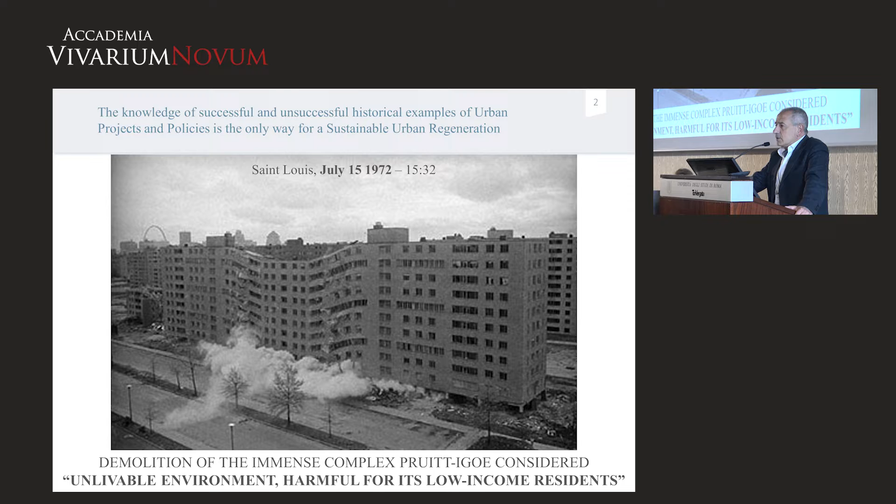Later, I decided to do like Saint Thomas and put the finger in to see if that was true or not. And I discovered that on July 15, 1972, the Pruitt-Igoe was demolished, because it was considered harmful for the working class living there, extremely dangerous socially speaking.

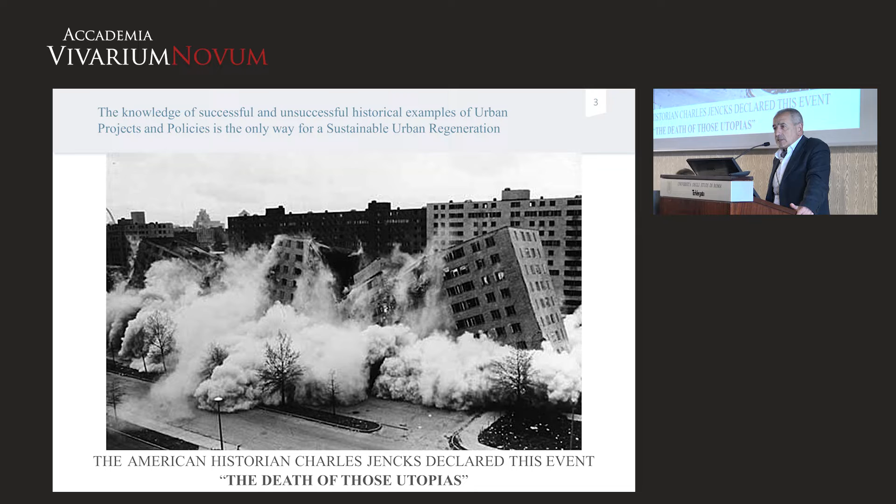Charles Jencks said that the demolition of Pruitt-Igoe was the death of those utopias. In Italy, we are so smart that just 3 years later, we decided to build the Corviale in Rome.

Come on. Today we are building a lot of shopping malls, while the United States, where shopping malls were invented, is dismantling those things. So we always arrive late and late and late. We are taking things that are abandoned abroad because probably the same investors making those things abroad know there are countries with stupid people accepting those things.

Since utilitas is important, since costs are important, I spent a lot of time in the archive of Rome. I also restudied all the laws, all the tools made in Italy, made in Rome, after the unification of Italy, because I was puzzling over the fact that the best modern buildings were those built in the worst period, when people were really pressing Rome with new inhabitants.

The city of Rome before unification had 165,000 inhabitants. In 60 years it became a city of 1,200,000 inhabitants. Nevertheless, we have quarters like San Saba, like Testaccio, like Città Giardino Aniene, like Garbatella.

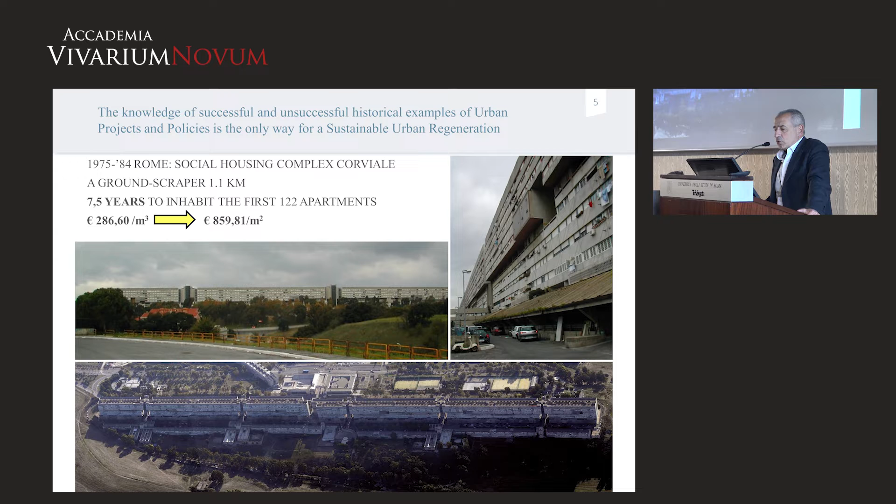As I said, I wrote many books on these studies I made. One was translated in Latin. As you can see, it was also translated, one of my books.

When I'm talking about social housing, I'm not talking about social housing as a working class district, because in those days people were wise enough to understand that segregation was making the problem even worse. It was necessary to have integration of people. So when we talk about building the social housing districts, we're talking about mixed use, mixed income buildings.

The strategy they made in those days allowed, in reality, the Comune di Roma to solve the economical problem. The Comune was in bankruptcy because, like what we are doing today, everything was demanded of private investors, and the Comune was just paying the bills, and step by step it went to crack.

Differently, they codified a fantastic system that, if today taken into consideration, investing the money of the PNRR for this kind of intervention, we can solve the problem of the environment, we can solve the social problem of the social disease of suburbia, we can have alternatives to the historical centers, because if the historical centers are overcrowded it's because people are coming from the suburbs looking for the spaces that have been denied in their districts.

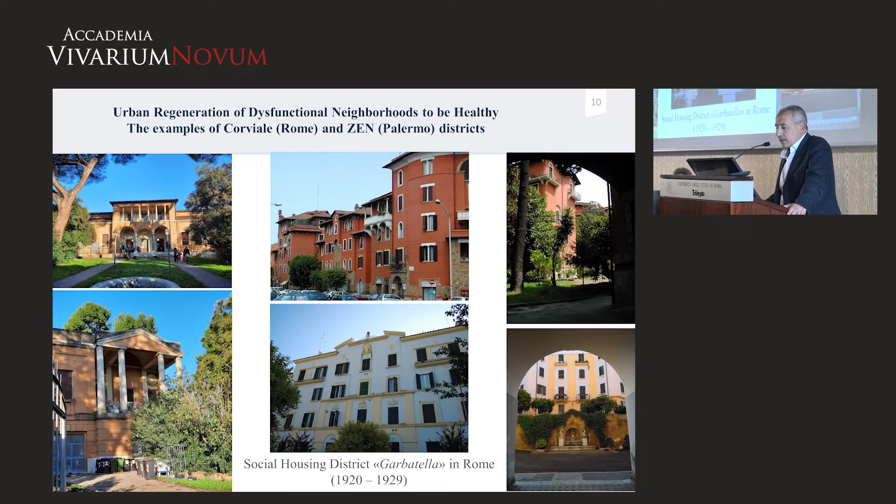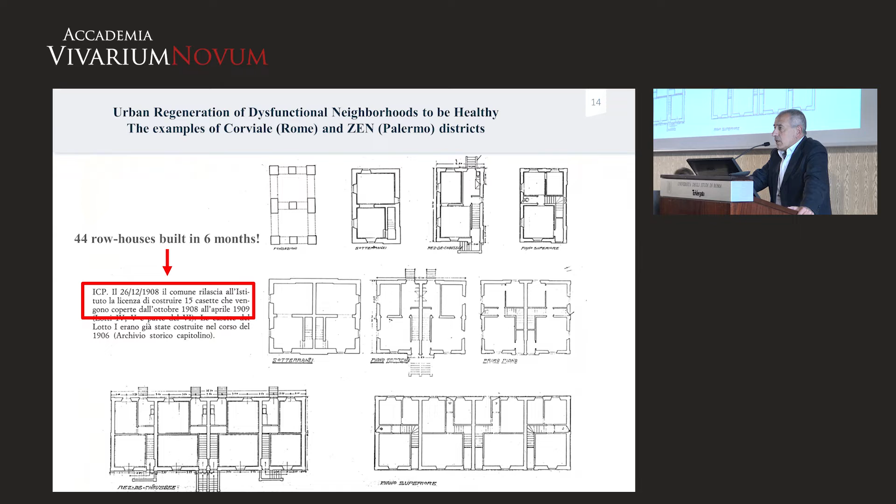And about the timing, this really shocked me. The first 44 houses of the San Saba district were started in October 1908. By April 1909, families were already living there. Those buildings had never been restored in more than 100 years.

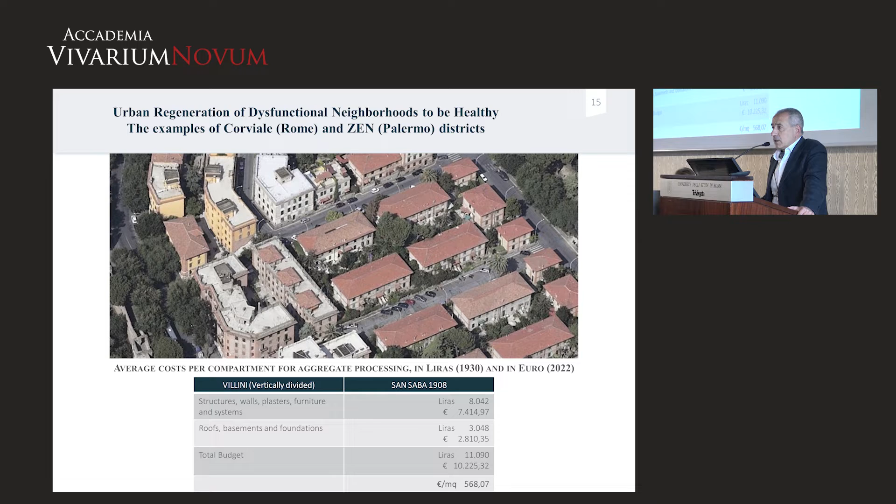And this cost only 568 euros per square meter, if we reevaluate the money, the costs of those days. So we're talking about a difference of 300 euros per square meter compared to the Corviale, which took 7.5 years to be finished, just to have the first 122 houses.

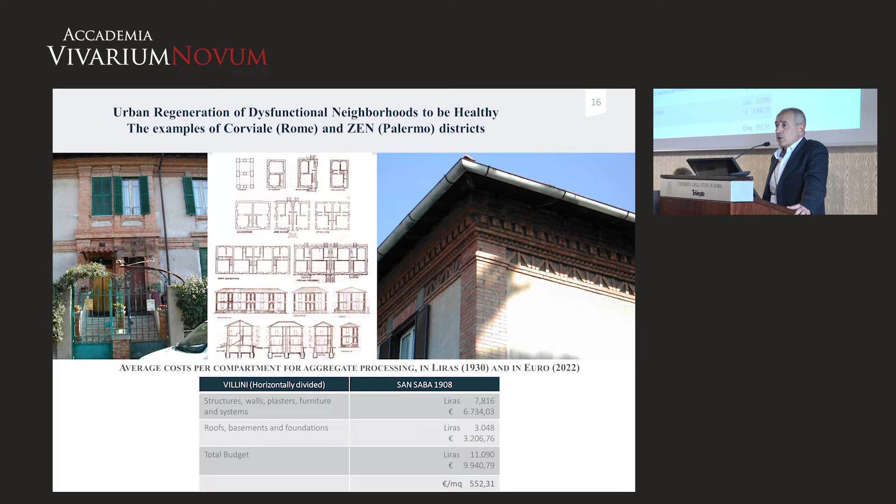These buildings are very simple, where the architect designed the building and then worked hand in hand with the craftsmen, who made this beautiful decoration with the bricks.

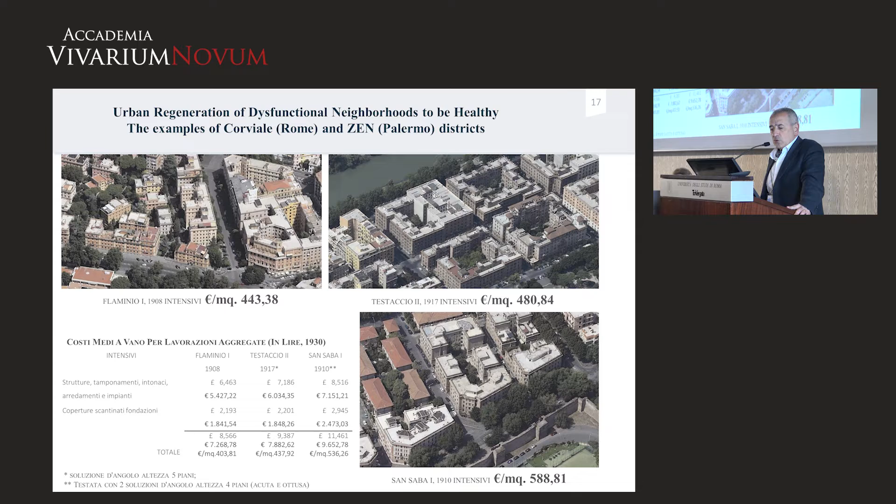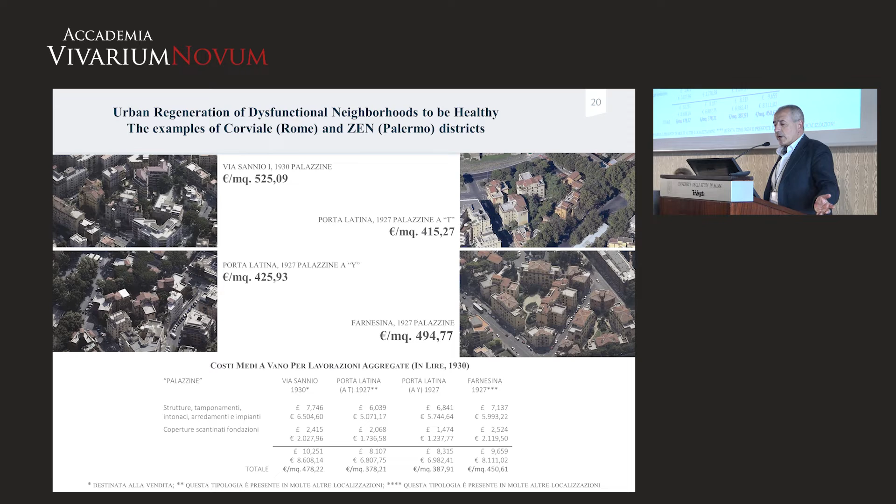I made this study for all the different typologies of houses built at the beginning of the 20th century. And at the end, what I discovered is that everything I was studying took very few months to be built, maybe one year, and the costs were extremely reasonable. Why is this no longer possible?

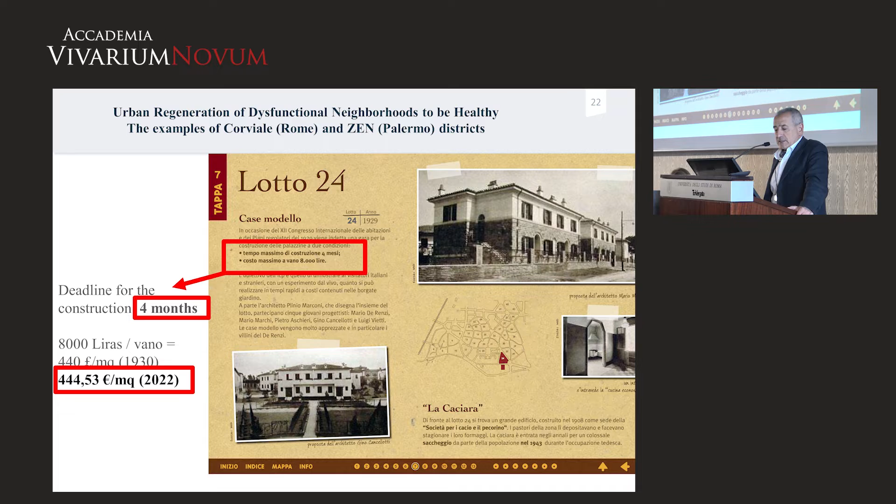If we take lot number 24 of Garbatella, it was conceived as a kind of demonstrative project. It was given 1 month for the design and 4 months for the construction. The buildings are still there. So what's the point of saying there's no way to solve the refugee problem, for instance, if these are the real construction times?

These are the buildings built in 4 months at lot number 24.

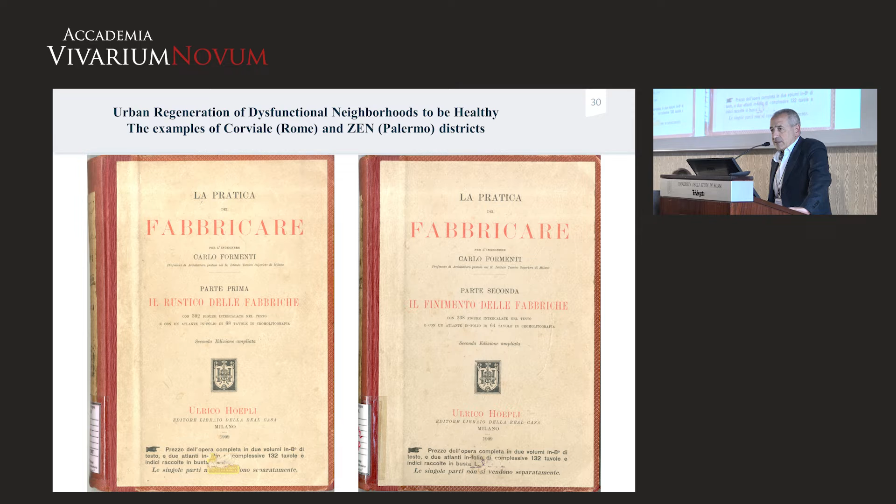So why were they so fast in those days? Because the practice of construction was based on this manuali di costruzione, one of the most beautiful books - not in terms of content, but because of the representation. Every little part of the building is well documented with watercolors, from the foundation to the scaffolding to the centering. Everything is extremely well represented. It's the manuali of Formenti.

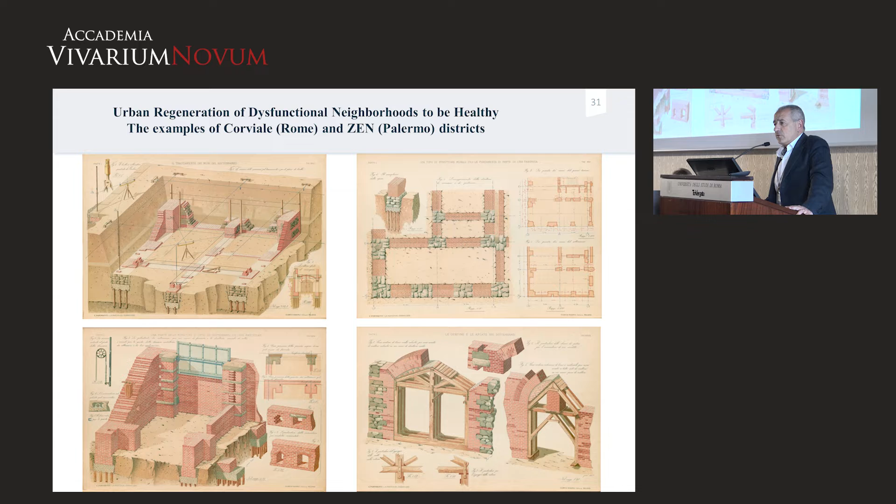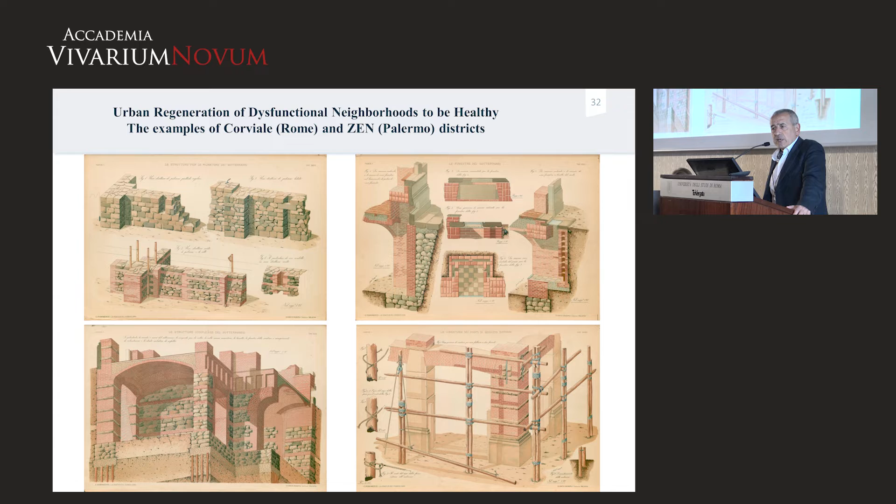This is from 1909, and it was used not only in Italy but also in Argentina. Many South American countries where a lot of Italians live used to work with the construction method made by Formenti in this manual.

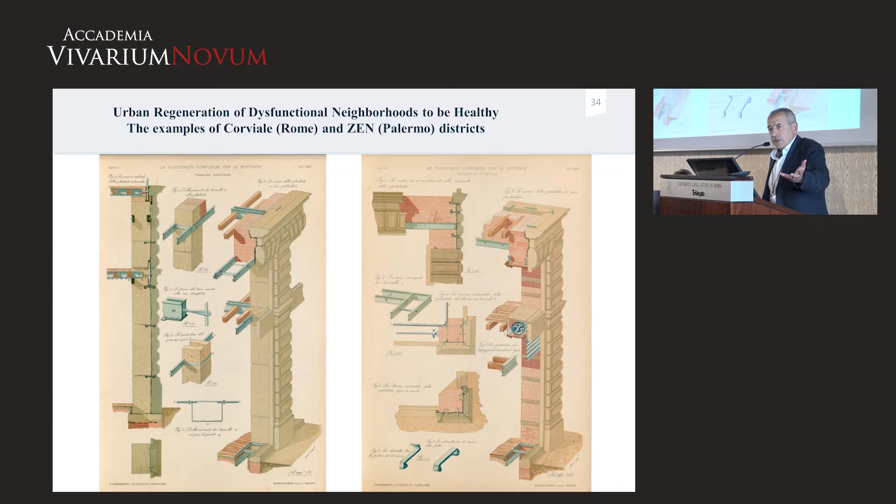And this is not some kind of purist approach related to antiquities, because he was open-minded enough, like Viollet-le-Duc, who was considered the criminal of false restoration simply because he was in favor of the French medieval heritage versus the Beaux-Arts system. As you can see, there are iron details, iron beams, tie beams, tie rods used in the construction method, which is not falsification. It's a system to make the building even more secure, while at the same time having a perfect behavior in terms of...

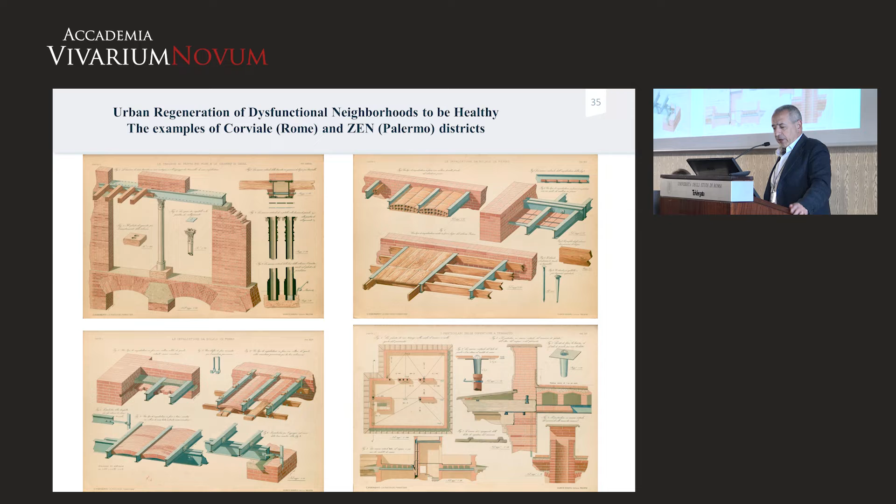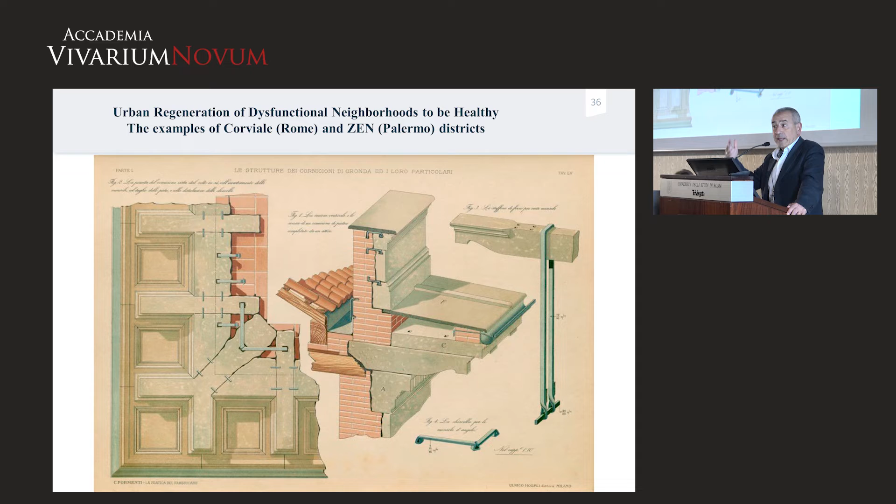thermo-hygrometric system. One of the interesting solutions in those days was the use of shallow brick vaults between beams, which were the same iron beams used for railways. This allowed construction without waiting the 28 days needed for reinforced concrete. And everything was working very, very well.

But now, talking about costs and real estate - in 2020, an auction was launched for selling one of the houses built in 6 months at San Saba. The starting price for the auction was 1 million euros, which means 11,111 euros per square meter, for social housing.

Now, if we want to be even more evil, we can compare this cost to current construction, and if we also consider thermal behavior compared to green architecture - bioarchitettura, LEED architecture - we discover that those buildings cost up to 73% less than these costs.

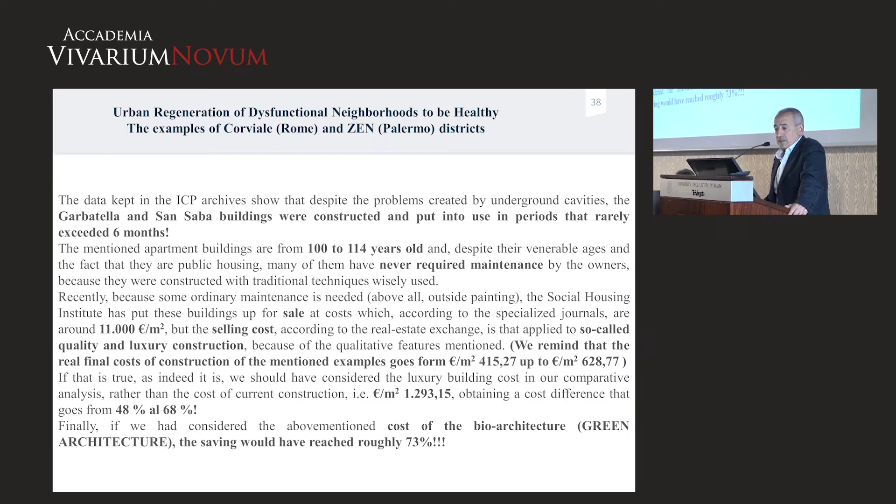Who's telling lies? Now someone might say, okay, you're a dreamer, you're doing those things without being sure what you're talking about.

This is a wine cellar built in 2009 in Gorizia. Each one of these spaces is 6 by 6 meters, built with a sail vault, built by one worker alone with someone passing the bricks, using a technique that doesn't need any centering. So we're talking about every space being 36 square meters.

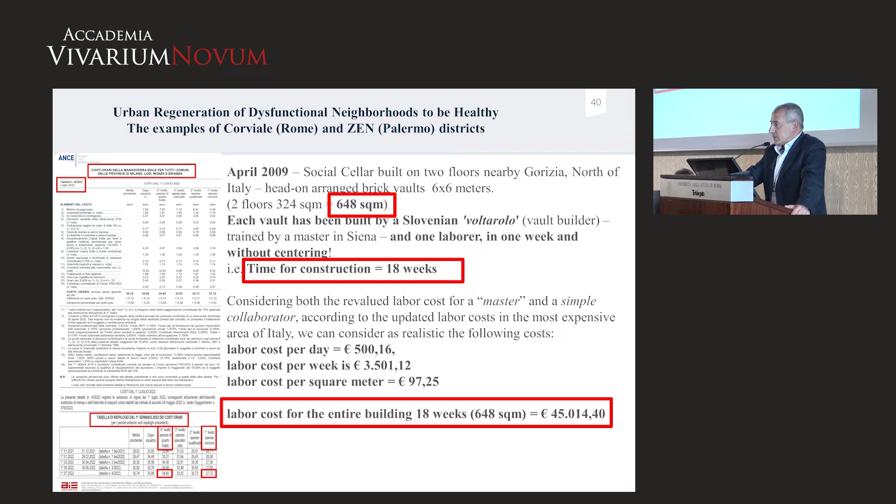But now, making the real cost calculation, I want to be very generous and take the labor costs in the region of Milan, which is the most expensive in Italy, and I discover that the construction of this building, which is 648 square meters, costs only 45,000 euros in terms of labor. What costs is not the material, it's labor. So if we can use techniques that shorten construction, we can have low costs.

So it's time to say, okay, shut up when they tell you that traditional methodology is more expensive than modern methods. Because if I start presenting the real bottom-line costs of the Nuvola di Fuksas, the Vela di Calatrava, and all these monstrosities that have been realized recently, I think you will take a gun.

If I make a comparison of thermal behavior, since someone can say you're talking according to your ideology, I take a book written by engineers on hygrometric, thermo-hygrometric evaluation, and I can see that traditional buildings behave better than any kind of modern building. They don't generate the dew point that brings condensation inside the building, which causes asthma - a problem Le Corbusier didn't take into consideration when he built the Villa Savoye, and he was later sued by the owners because their child started suffering from asthma.

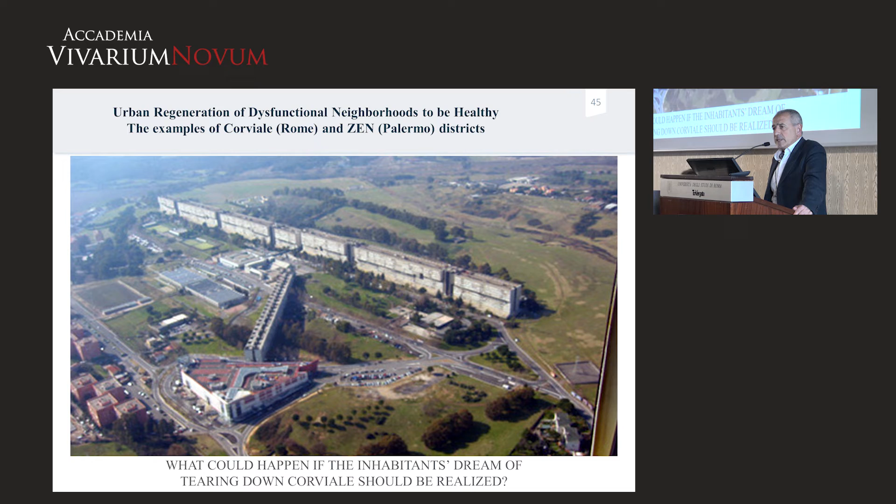So instead of continuing building on private land in the middle of nowhere, 3 meters beyond the sign 'Welcome on the Planet Earth,' we can recompact the city, filling those voids, which means no cost for the land. Obviously, this is something that doesn't make speculators happy.

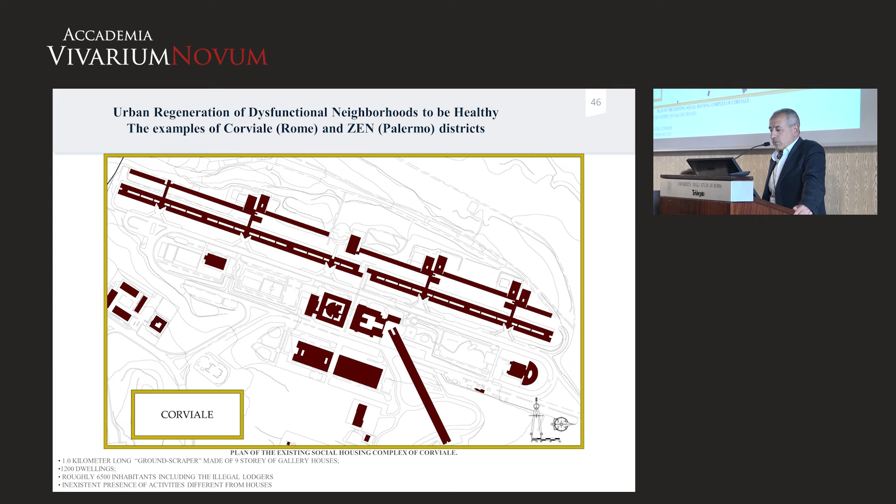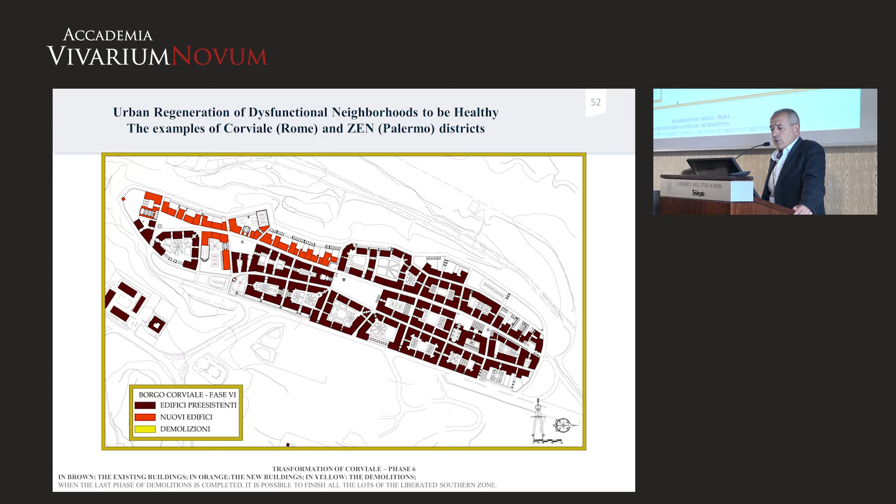But if we really deal with sustainability and the environment, we have to do that. We can't disrupt the social life of the poor people obliged to live in that monster ground scraper. But if we fill the spaces, save infrastructure, and respect the topography step by step, we can move from this monster and build the first buildings. When these are ready, we move the inhabitants a few meters and demolish the next buildings. Step by step, we move to a borgo where we have 5 piazzas. Thank you.

But urban design doesn't mean only designing blocks. Urbanism is the design of the voids, the design of spaces for gathering people. So it's necessary to think about pedestrian life. As you can see on the main street, you can have 5 piazze, one next to the other.

Watching the model of building districts from the beginning of the 20th century, it's possible to have permeability inside the courtyard, where you can display gardens, playgrounds for children, and spaces for the leisure of the elders.

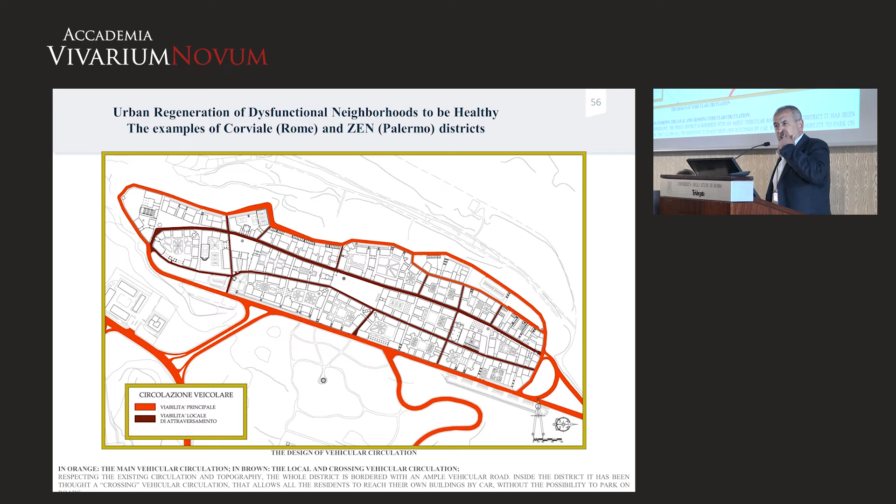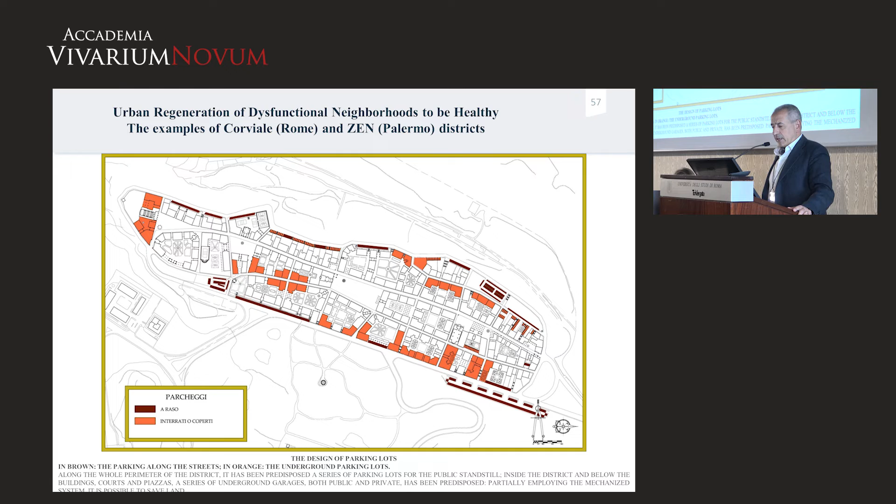We have to think about circulation, with peripheral circulation for the main traffic and local traffic in the center, where people can drop off whatever they have to do and then disappear. In the basement of the building we can have parking, and around the district we can have street parking for the public.

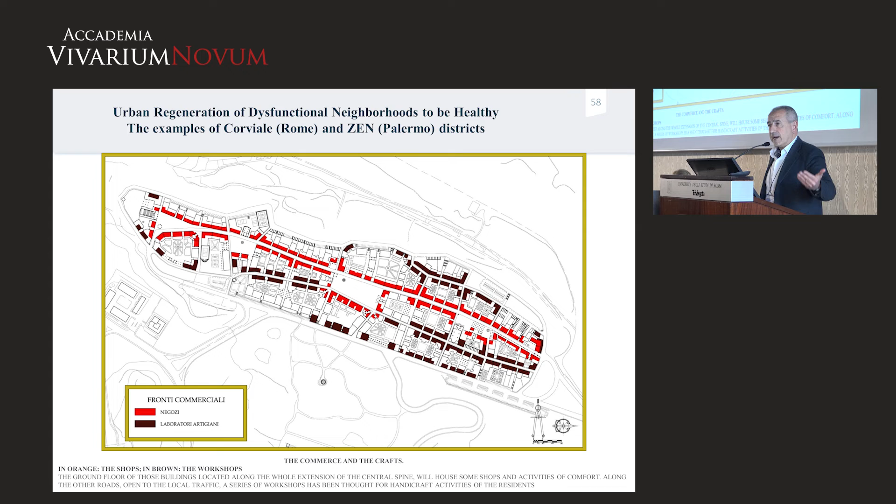Instead of building a shopping mall, you can have a widespread shopping mall with shops on the ground floor along the major street, while on the secondary street you can have workshops for workers who want to have the bottega just below their feet, below their houses.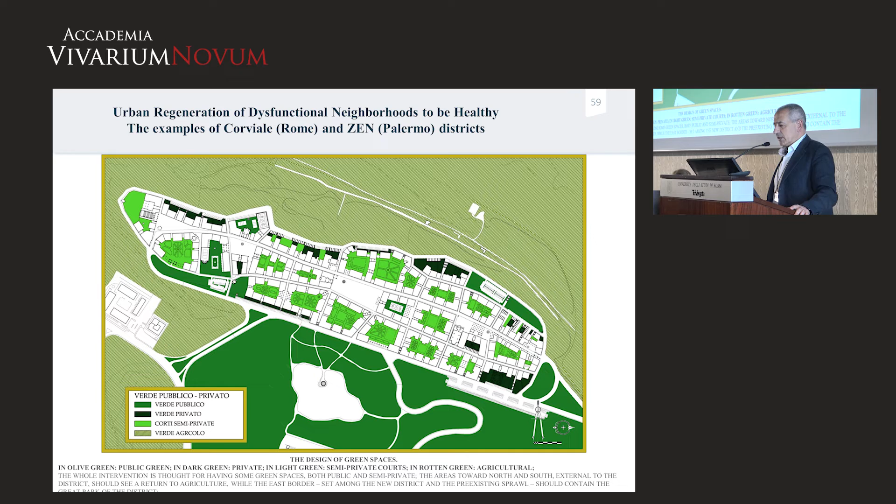We can plan green spaces, thinking about public green, private green, semi-private, and agriculture. And we need to consider that a city works, as Leon Krier always says, when you have the overlapping of the res publica and res privata, or economica—the public buildings justifying the piazze, and the private mixed-use buildings—then you have the civitas.

If we have this, we have to ask: how much does it cost? Let's say what the cost is. I made an evaluation of the cubic meters of public buildings, and of private buildings, which also allowed me to understand how many inhabitants I can put there.

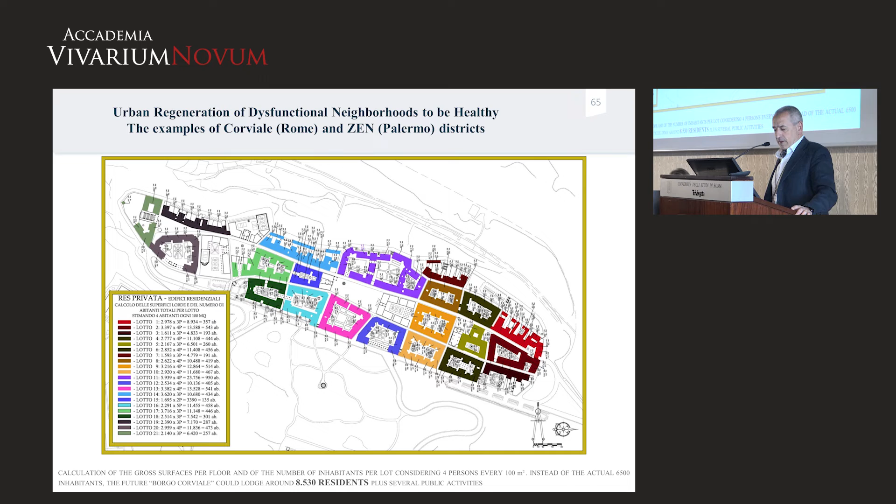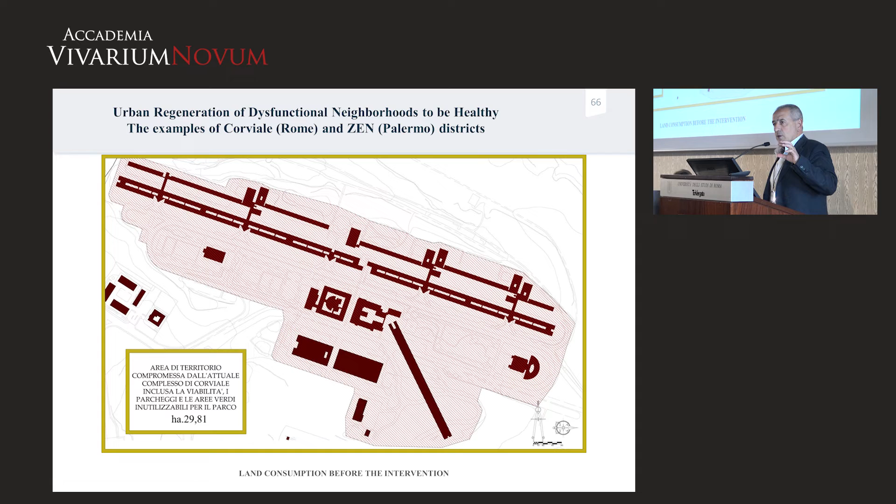I can have even 2,000 inhabitants more than what we have now in Corviale. At the end, this means I can also have houses for sale and shops for sale. One of the most interesting aspects is that the present Corviale consumes 29, almost 30 hectares. The future one can give back almost 12 hectares to the countryside.

When I talk about the courtyard, I mean the courtyard of the district I showed you, because this was the request of the inhabitants of Corviale when, in 2000, they were interviewed by the inspector who came to understand the reason for the bankruptcy of the ICP. He made a kind of referendum, asking: what is your idea of a house?

And everybody said, we would like to live in a place like Garbatella. So if we simply respond to the needs of these people—as you can see still today in the courtyard of Garbatella—kids are playing inside public spaces instead of getting stupid in front of some PlayStation.

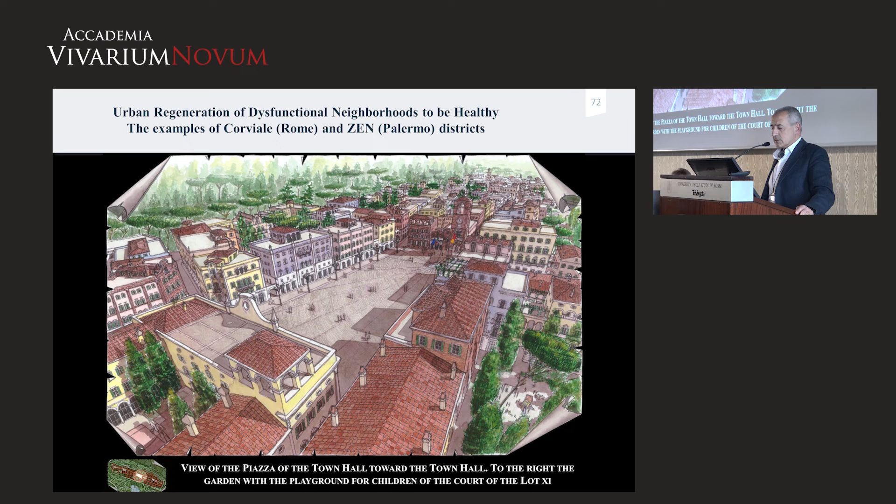At the end, I made some renderings, some quick watercolors, to show what could be the character of this place, inspired by the architecture they were looking for. This is a view of the main piazza from the town hall to the elementary and kindergarten school. This is a view from the opposite direction. And this is a view of one of the courtyards, with a garden where you can see the playground on the right side.

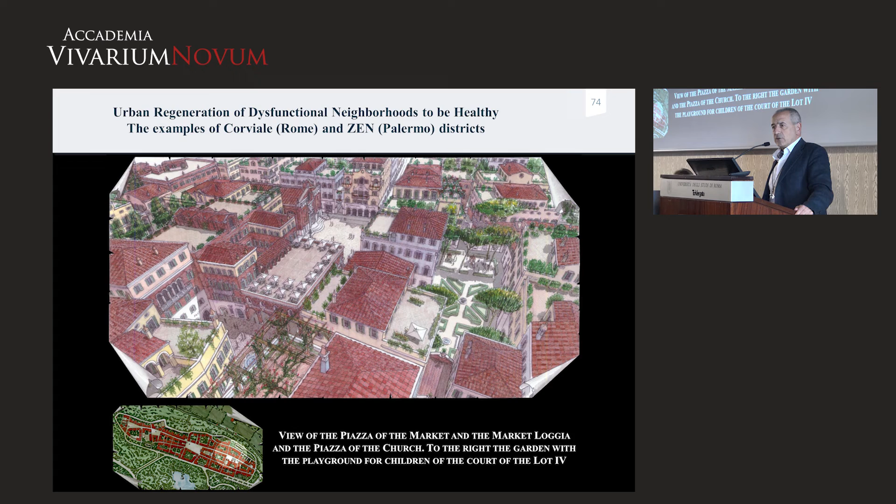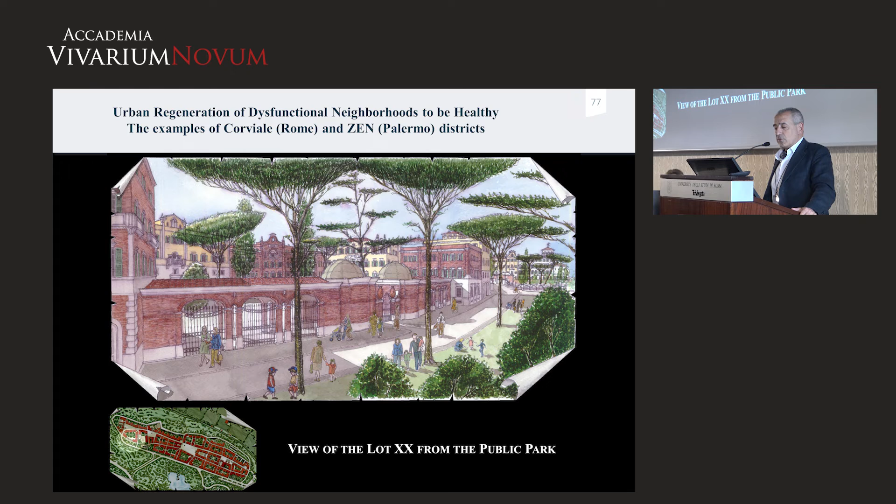This is a view of the enfilade of piazze nearby the Market Loggia, and this is the view at the ground level of the Market Loggia, and the opposite view of the Market Loggia and the church. This is a view of the extreme border of the district where the public part starts, and this is a view of the piazza leading to the movie theater at the end.

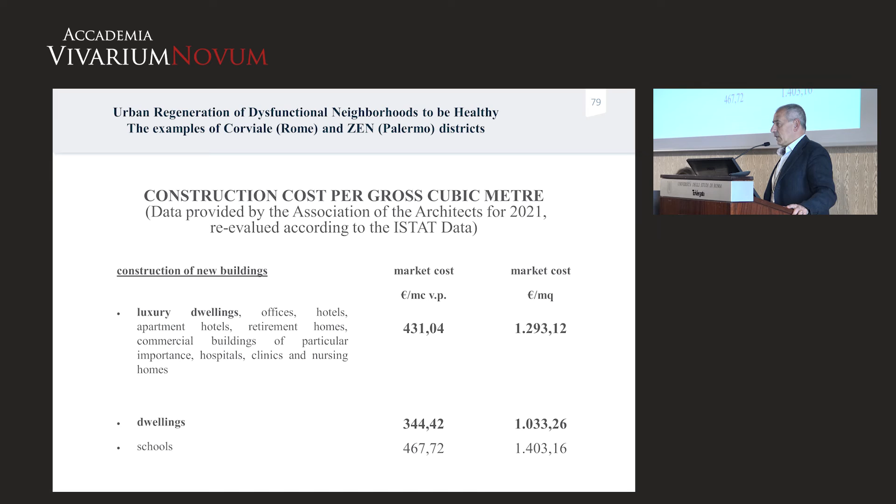Obviously, I made an estimation of the cost of construction using the cost of construction documented every year by the Association of Architects in Italy. Using this parameter—I have only less than 7 minutes, so I need to accelerate.

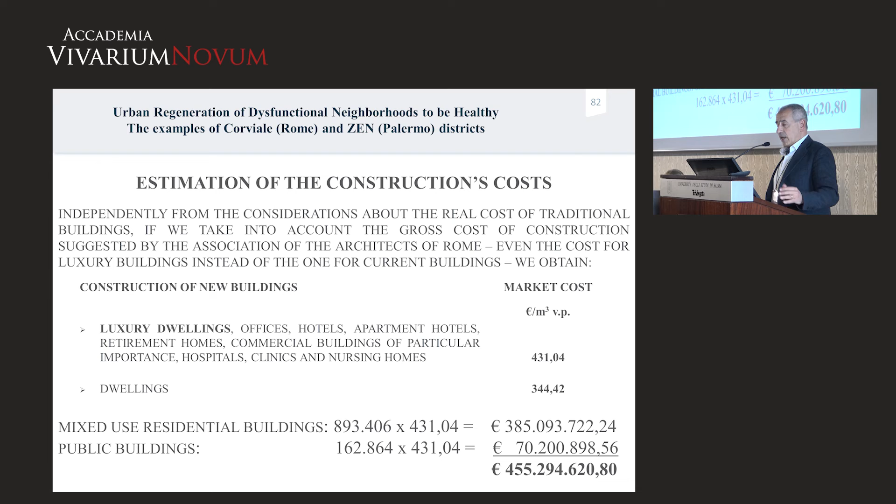I made an estimation of the demolition cost of Corviale based on the real bottom line cost of demolition of one of the monster buildings, Le Vele in Napoli, and used these costs for the demolition cost of Corviale. I evaluated how much it costs to build the new Corviale in that manner, and at the end I have some investment of almost €500,000,000.

But what is interesting is that from the sale of the exceeding apartments, from the sale of the parking, from the sale of all the other public buildings, the shops, the workshops—even using a real estate value less than what it is today—we can have a public profit of 589 million euros, possible to be invested for the regeneration of another suburbia, without reinventing the wheel, but simply taking into consideration the lessons of the early 20th century.

After this project, 200 inhabitants of the most difficult district of Italy, lo Zen di Palermo, decided to tax themselves to give me some symbolic reimbursement to see if this was possible to be done also for their district.

I accepted this social challenge, and just to—well, something has to be said, because earlier we were talking about the claim technique and the falseness of all these stars.

Vittorio Gregotti, the architect of Zen di Palermo, when he built the Zen in Palermo, said that building was the interpretation in architecture of the ideal of the New Jerusalem, the place of the classless society.

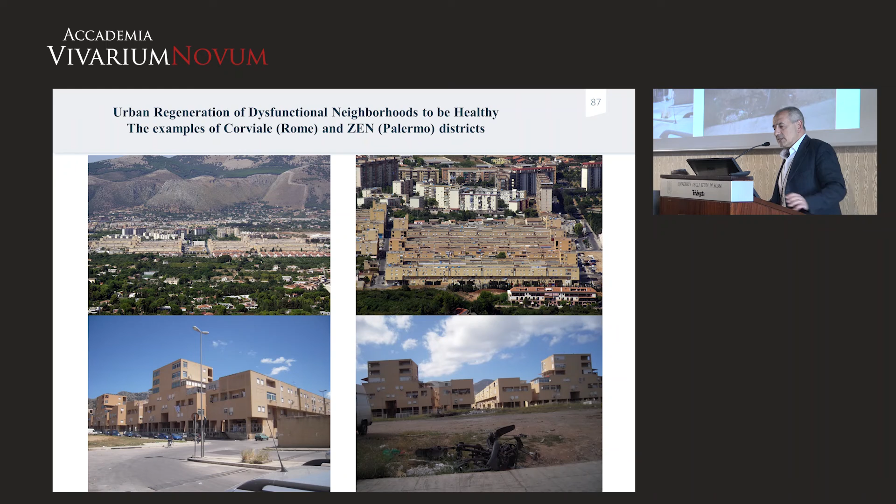I said, but would you—why don't you live there? And his answer, about the New Jerusalem district, was, what are you talking about? I'm doing the architect, I'm not a proletarian. This is a horrible shame. So this is the Zen, which is a kind of jail, as you can see.

And even in this case, filling the voids step by step, it's possible to create a borgo.

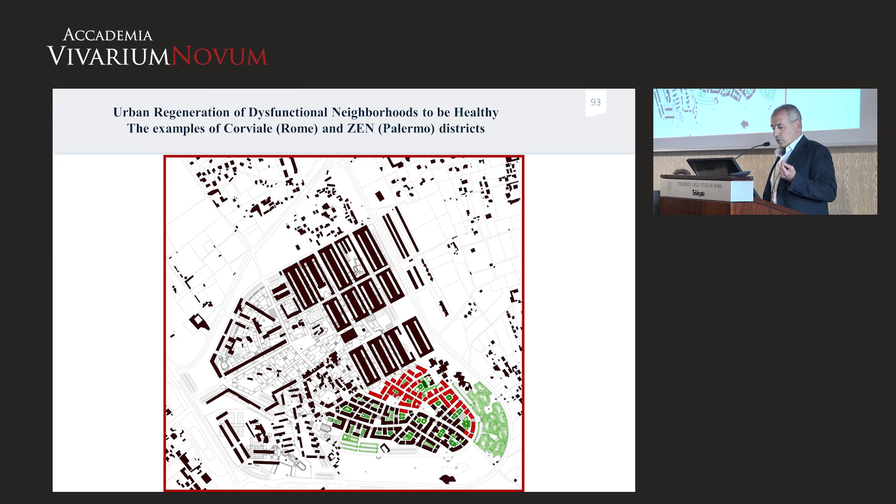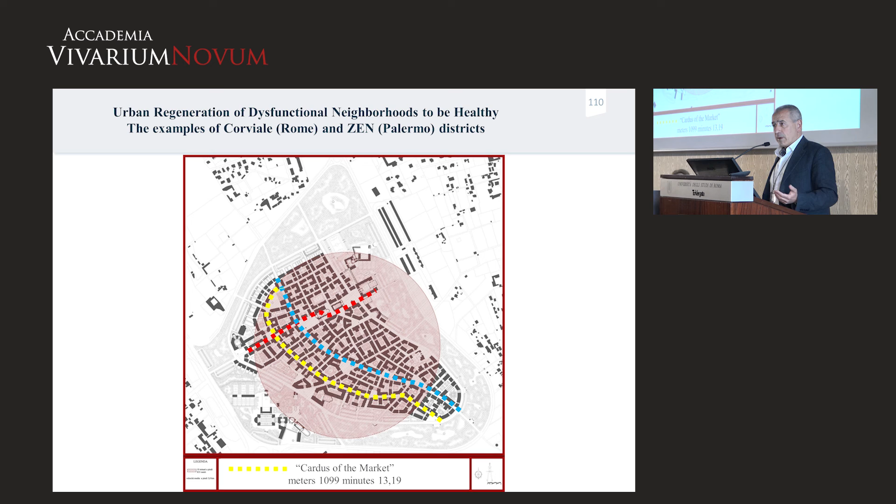And even in this case, I made all the evaluation costs. I evaluated the 10-minute walk with this diameter, the distances of the main streets, the street market, because many of the inhabitants of the Zen are selling their goods at the 3 street markets, but they would like to have one near their feet. Every 2 minutes there is a piazza or piazzetta.

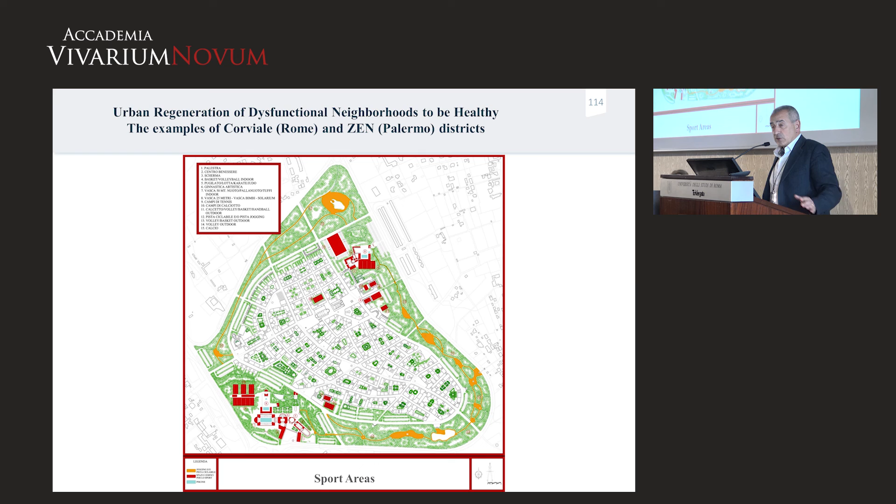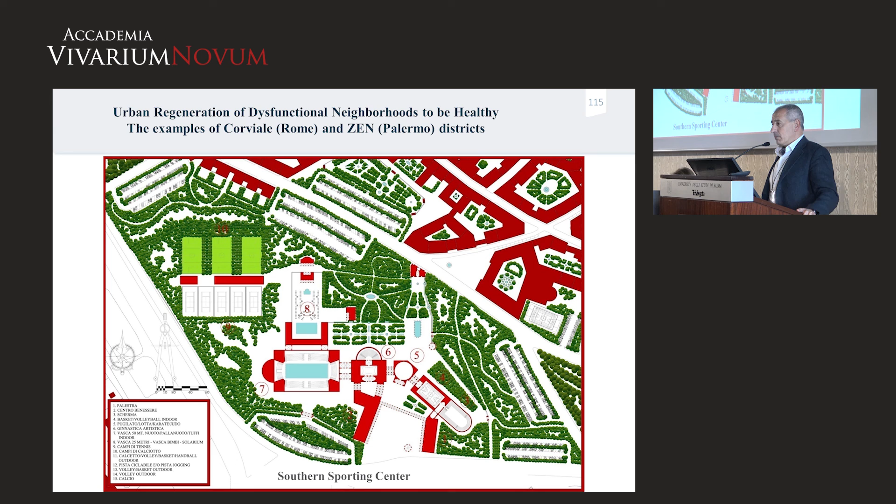There are a lot of spaces, brown for kids, yellow for elders, all the schools necessary for this little city, all the sports activities with buffer zones to create separation from the peripheral street around. All the sport, because I was asked by the inhabitants to increase as much as possible the presence of sport activity, to prevent the possibility of kids being kidnapped by the mafia in Palermo, giving them distraction from that.

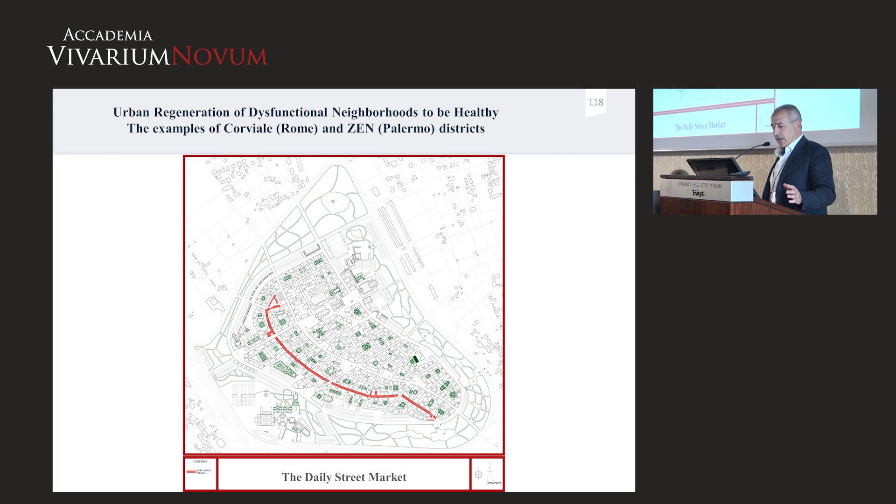And at the end, we can have a profit of 255 million euros, instead of wasting our money on the impossible construction of the bridge on Messina.

These are views I made, which obviously speak the language of Palermo, not the language of Rome. Thank you.